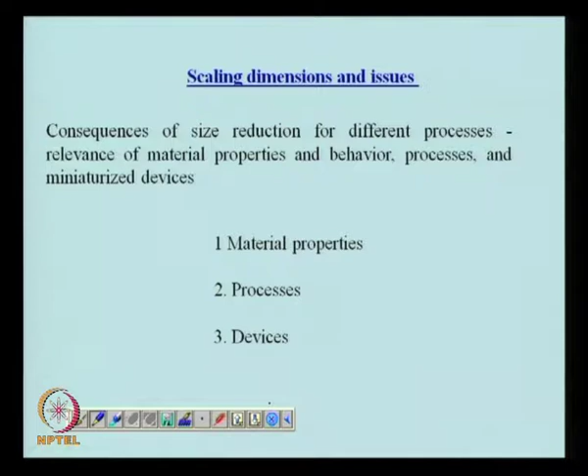For example, one of the interesting ways by which a process can behave differently is that the material properties of the liquid, of the fluid present in the system, may behave differently when the sizes are reduced to a certain level.

So, in today's class, we will see principally how the reduction in dimension of a system can result in substantial changes in the material property, changes such that many of the equations which were applicable for bulk flow will no longer be applicable for such systems. We would also see that measurement of any property may show statistical fluctuations which cannot be ignored.

So, depending on where you measure a specific property, let us say the density, the concentration of a fluid, you may get different results. You would also see that all the gases present can be divided into two categories, what is known as the dilute gas and the dense gas.

The equations of motion, for example Navier-Stokes equation, may not be applicable in some such systems where the sizes are very small, or where the pressure is relatively low and so on. So, there is definitely a need to demarcate the region where these equations, the continuum concept, is applicable, and a region where these assumptions, this continuum assumption, will start to show significant deviations.

So, what should we do? There are different ways to treat systems which are in different zones of continuum. In some cases the continuum theory is completely valid, in some it is partially valid, and in another it may not be valid at all.

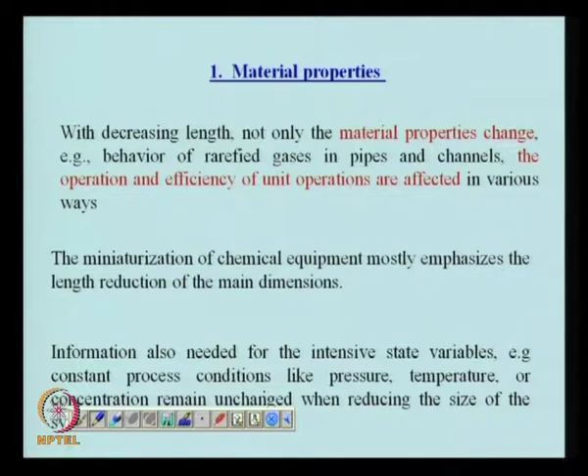So, in free molecular motion, the molecules do not come in contact, they do not collide, and they do not essentially see the presence of another molecule in there. So, it can traverse the entire dimension of the small device without encountering another molecule in its path. This is going to be characterized by a large value of the Knudsen number.

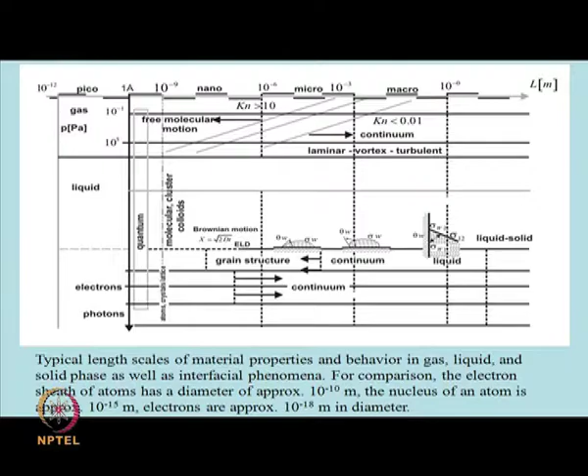Now, what is the continuum hypothesis? If we start reducing the volume of any system, at some point it starts to influence the properties of the fluid, and the measurement of process parameters like density, velocity, or temperature will be affected by the reduction in size of the system.

Physical quantities and fluid properties are usually treated as being uniform over a control volume, so no matter what the control volume size, we assume the physical properties do not change. But if we think of a very large control volume, then you can have spatial or temporal variation of properties.

At one end of the spectrum, the physical or thermophysical conditions, for example pressure, could be widely different from one location to another, and the best example is the atmosphere. It's such a large system that you can have variation in pressure depending on where you are. Inside this room the pressure is uniform everywhere, but if you go 10 kilometers away, the pressure may vary. So for very large systems too, you may see a change in the properties of the system.

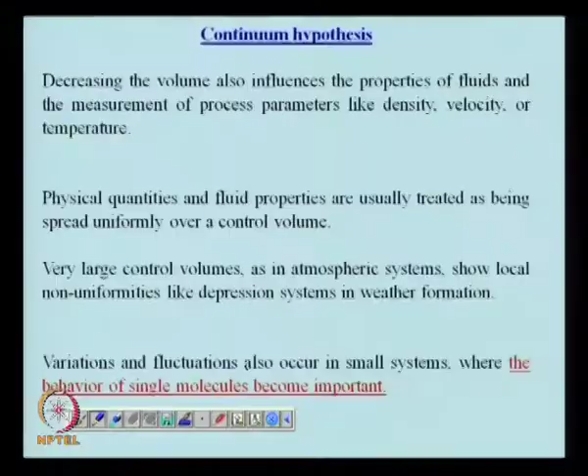So if your measurement volume is 1 micron by 1 micron by 1 micron cube, and your pressure is really low, the number of molecules can vary significantly inside that cube. So you may have a fluctuation due to the absence or presence of molecules in such a control volume.

This effect of the size of the sensitive volume on the density is usually measured by an instrument. So depending on the amount of volume necessary to measure a property by the instrument, its reading may vary when you reduce the size of the system.

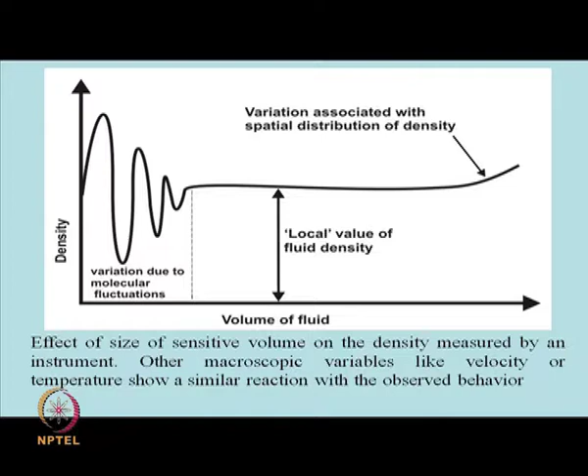And we would see how this is going to affect the continuum hypothesis. So, when we start reducing the volume, the molecular fluctuations would start to disturb the smooth measurement. So, you are not going to get one value of pressure, but you would rather get a fluctuating pressure that can vary widely from one instant to another.

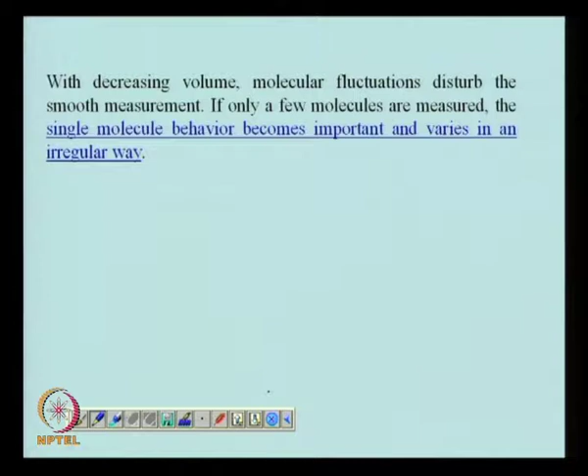So, when you reduce the system to such an extent that you are measuring only a few molecules at a time, then the single molecule behavior will become extremely important and will vary in an irregular way, and we would like to see how we can express such variations using non-conventional approaches other than the continuum assumption.

So, the definition of a continuum is that a fluid can be regarded as a continuum where the fluid properties you measure will be constant for sensitive volumes, that is the volume necessary to measure that property with the instrument you are using. And the volume used to measure the property is small on a macroscopic scale, but large on a microscopic scale. So, I would give you an example of what we mean by macroscopically small but microscopically large.

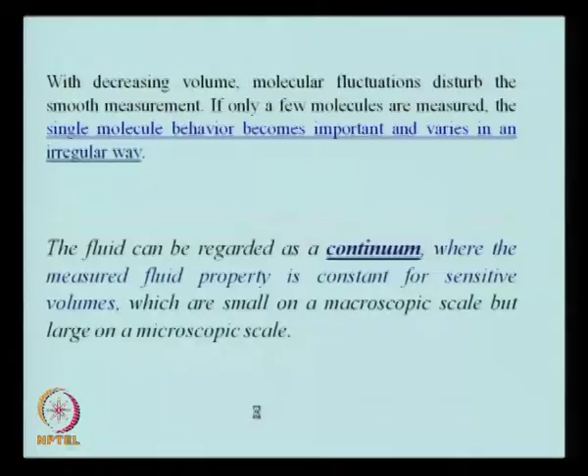Let us say we take air and try to see the number of molecules present in air at normal conditions. Think about a 10 micron cube, instead of the 1 micron cube example I gave you. It is a cube formed of 10 micron by 10 micron by 10 micron. If you calculate the number of air molecules present in such a cube at normal pressure and temperature, you would see they are of the order of 10 to the power 10. So, it is a huge number of molecules.

So, the effect of molecular fluctuations on any measured property will not be felt if your measurement volume is 10 micron by 10 micron by 10 micron. So, for all practical purposes, these statistical fluctuations are going to be insignificant in such a system at normal pressure and normal temperature. But what happens if we reduce that pressure or the temperature?

That is something, or if we reduce from the micron level to the nanometer level. So, would it still represent a situation in which the properties are going to be independent? Are the sensitive volumes still going to be so large that the number of molecules present in it are going to be very, very large, of the order of 10 to the power 8 and so on?

So here you see the sensitive volume of a 10 micron cube is very small when we think about the macroscopic scale, but it is still very large when we think about the microscopic scale, because the number of molecules present in such a system is so large.

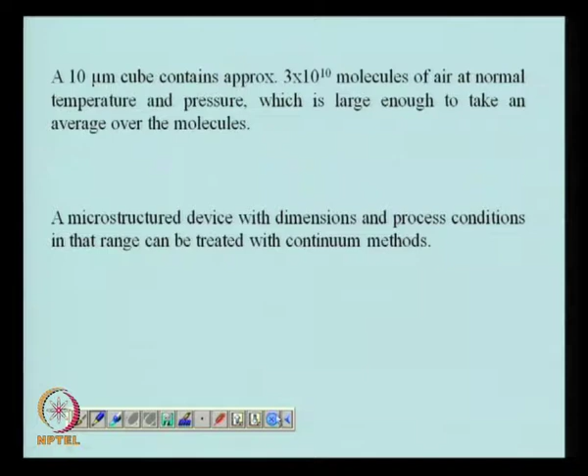So, if you think of a microstructured device whose dimensions and process conditions are of the order of 10 micron, 1 atmosphere, and let us say 25 degree centigrade, then in that range the fluid present in that microscopic device would obey the continuum assumption. All the methods and models available for continuum situations would be valid in such systems.

But we are more interested in the limits of the continuum hypothesis, where they are going to be reached, where the continuum assumption will not hold good, and a description of the gases which are also termed as rarefied gases beyond the continuum hypothesis. So, you would like to see where to draw the line, how to present a quantitative way to decide whether you have reached one limit or the other of continuum.

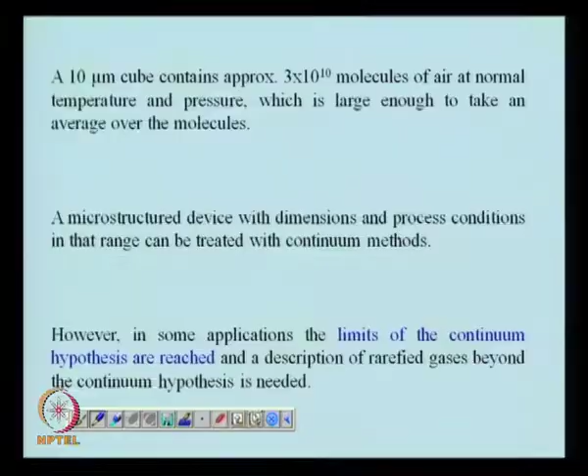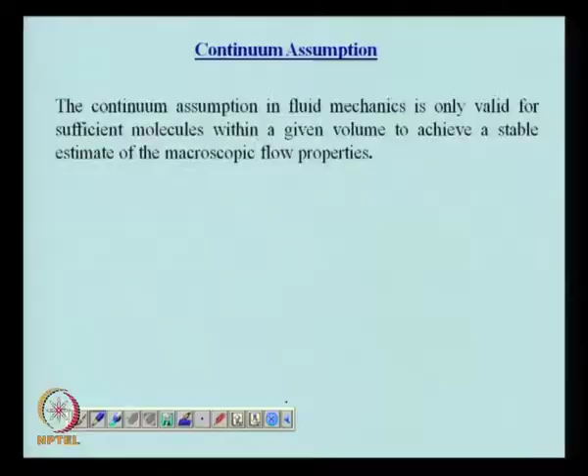So, the continuum assumption in fluid mechanics is only valid when you have a sufficient number of molecules present in a given volume, so that you achieve a stable estimate, stable meaning there are no fluctuations in the macroscopic flow properties. So, the pressure, temperature, etc., will remain constant throughout your measurement.

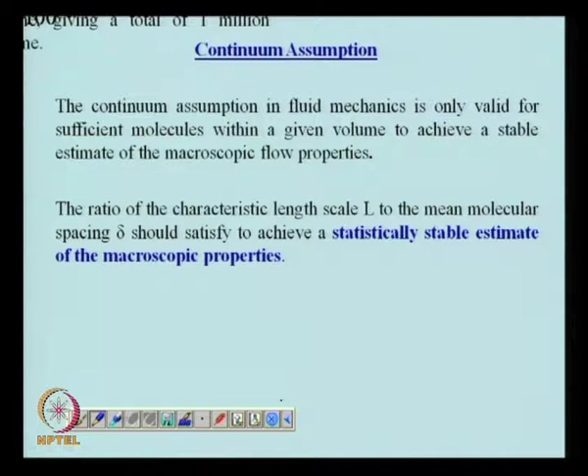So, this length scale that we need, the ratio of the characteristic length scale to the mean molecular spacing should be large, so as to obtain a statistically stable estimate of macroscopic properties. So, the mean molecular spacing should be quite small compared to the length scale, and it has been found that when L by delta, where L is the characteristic length of the device and delta is the molecular spacing, is greater than a certain number, then we can assume that we do not have any statistical fluctuations present in the system.

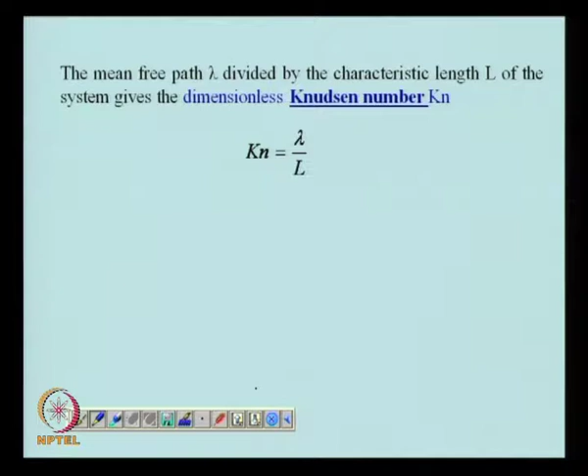Another way to say when I am going to reach the limit of continuum is to define a number called the Knudsen number, which is defined as the mean free path of the gas molecules divided by the characteristic length of the system. We get a dimensionless number known as the Knudsen number, and depending on its values, one can decide where we are in terms of rarefaction effects on the flow regimes of a gas. For different values of Knudsen number, we can classify flow regimes to say that this obeys continuum and this does not.

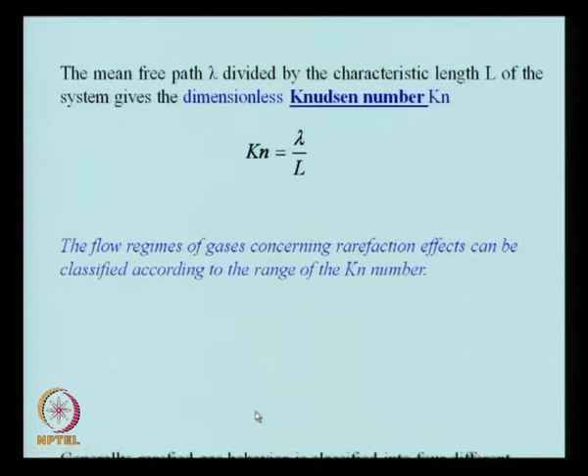So here you would see that for small values of Knudsen number, we can assume it is a continuum flow regime. That means the properties are going to be more or less constant, and you are going to have no slip conditions, validity of no slip conditions, and so on.

Between a Knudsen number of 0.01 and 0.1, we have the slip flow regime. We will discuss all these in more detail. Then when the Knudsen number is of the order of 1, you get a transition regime which lies between slip flow and free molecular regime, which is classified for a Knudsen number greater than 10. So, in between free molecular regime and slip flow regime, we have the transition regime.

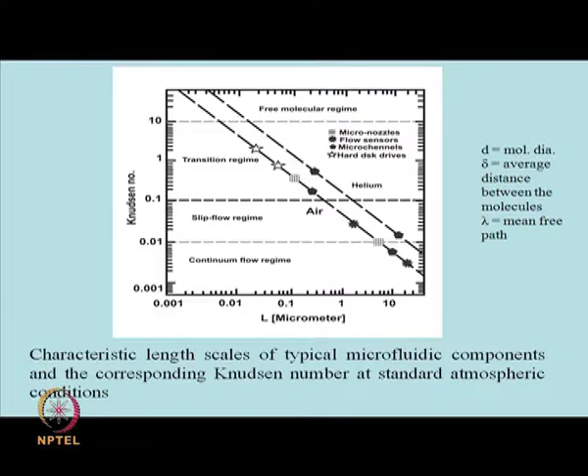So we will first start with situations in which Knudsen number is less than 1 into 10 to the power minus 2. This refers to complete validity of the continuum model. The continuum model says that when you measure a property, that property will not vary based on molecular fluctuations. You can use many equations valid for macroscopic systems, such as the Navier-Stokes equation, to describe the flow inside such a system, and you are also going to have no slip boundary condition at the solid fluid interface.

And if you think of the energy equation, you can assume without any error that the temperature on the solid side of the interface is equal to the temperature on the fluid side of the interface. In other words, the temperature is a continuous function even at the interface, without a jump of temperature or pressure at the solid fluid interface. So any system in which the Knudsen number is less than 10 to the power minus 2 can safely be assumed to follow continuum models, with all equations and boundary conditions normally taken to be valid for macroscopic systems.

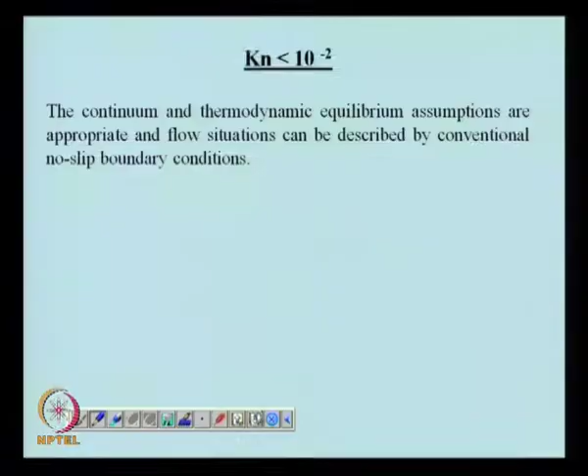Next, we come to the point where Knudsen number is between 10 to the power minus 2 and 10 to the power minus 1. Here, some models and equations, for example the Navier-Stokes equation, will still remain valid. Even though it cannot truly be said that it follows the continuum model completely, certain alterations or approximations need to be introduced into the Navier-Stokes equation to be used in the slip flow regime. As the name suggests, you have to assume that there is a slip between the gas molecules and the solid at the interface.

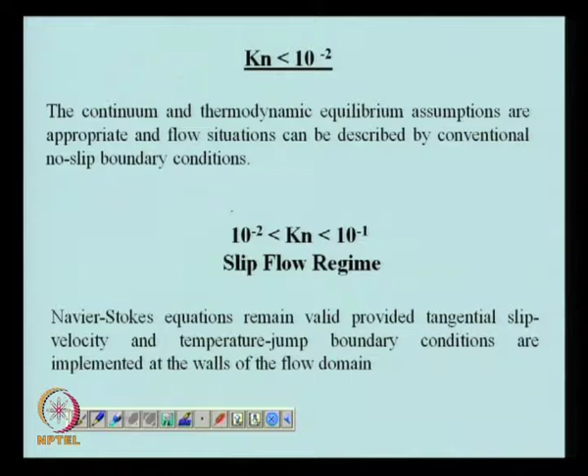As long as a slip flow is assumed, a temperature jump is assumed at the fluid-solid interface, and the Navier-Stokes equation can be used without any problem. This is a very common situation in microfluidic devices, the slip flow regime, and it becomes important when the Knudsen number is between 10 to the power minus 2 and 10 to the power minus 1.

Then comes the third flow regime, known as the transition flow regime. In this situation, the continuum and thermodynamic equilibrium assumptions of the Navier-Stokes equation start to break down, and you need alternative analysis methods, such as molecular dynamic simulation or Monte Carlo simulation.

You will not be able to use continuum models such as the Navier-Stokes equation, even with the introduction of slip flow, because the continuum limit is exceeded and there is a breakdown of thermodynamic equilibrium at the interfaces, but it still cannot be called free molecular flow. So this is transition flow, and it is also quite common in microsystems.

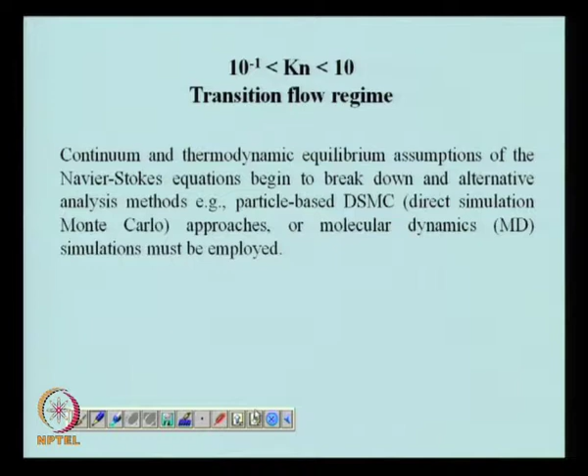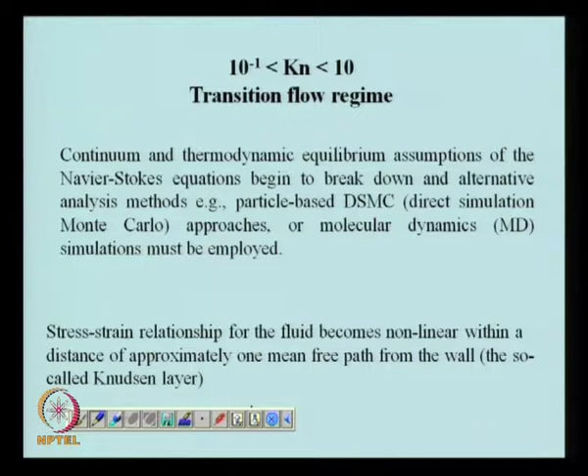Another interesting phenomenon in such systems is that the stress-strain relationship behaves in a nonlinear fashion within a distance of about one mean free path from the wall. This is called the Knudsen layer. If you cross the Knudsen layer, the stress-strain relationship will no longer remain linear. This is an additional complication one has to account for when modeling flow in the transition regime.

Finally, for large values of Knudsen number, we come to a situation known as free molecular flow, where the mean free path of the molecules is far greater than the characteristic length scale. Your characteristic length may be 0.1 micron, but your mean free path, because of the pressure and temperature conditions of the gas in such a micro device, could be 10 microns. So you have a large difference between the size of the system and the mean molecular free path.

The mean free path will be much more than the size of the system. Therefore, a molecule which gets reflected from the device surface will reach the other end of the device before it comes in contact with another molecule. That is why it is called the free molecular flow of gases in such a system.

As you can clearly see, the continuum approximation has no meaning in situations like this, because you just have a few molecules in a device, and relative to the size of the molecule, the device is very, very large, and relative to the separation between the molecules, the device length is very small, so that you do not have many collisions of the molecules in between.

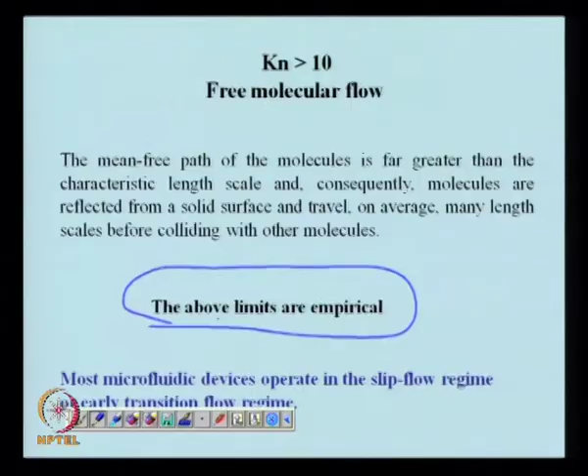Fortunately, most microfluidic devices operate either in the slip flow regime or in the early transition flow regimes. So many continuum models will be applicable if we add the slip flow condition at the solid-gas interface. The equations remain the same, but the boundary conditions need to be modified to analyze such situations.

Now, the question may arise: what is the length scale? Is it the smallest length of a device that is going to be termed the characteristic length, or is it something else? In order to circumvent the problems associated with defining the characteristic length, this definition is sometimes used: the property divided by the gradient of the property, which has dimensions of length, is sometimes called the characteristic length.

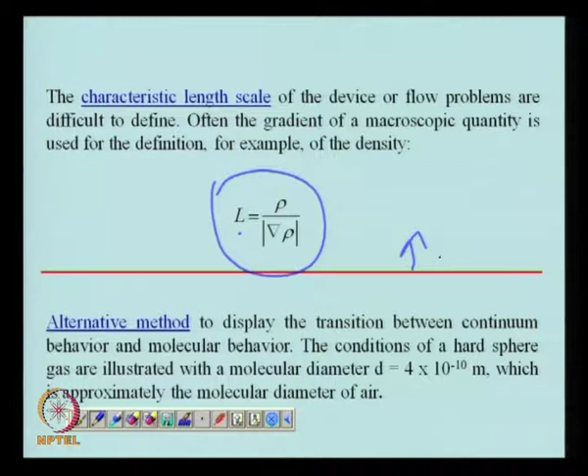So there is an alternative method. Up to this point, we had classification of systems based on Knudsen number alone, but there is an alternative method which displays the transition between continuum and molecular behavior in a more detailed and fundamental way, where we know precisely which assumptions of the continuum model are going to be violated and what can be done to address those violations. It is a more in-depth study of the variation of the transition from one regime to another, which I am going to present next.

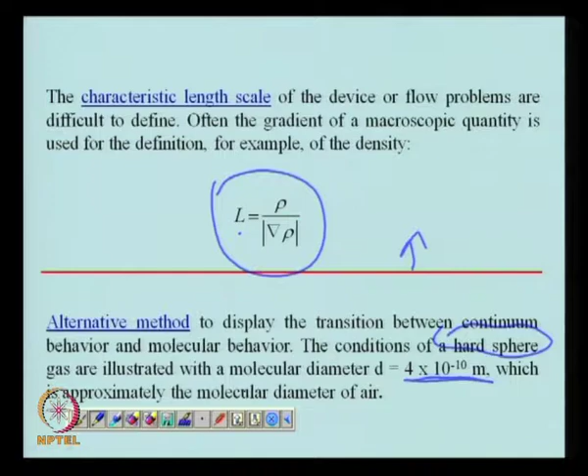For this, I take an example where we assume a hard sphere gas with a molecular diameter of 4 into 10 to the power minus 10 meter, which is approximately the molecular diameter of air. With that we would plot this, and this plot gives us more insight into the process.

On the left y axis we have the characteristic length L, defined either as the smallest system dimension or as the property divided by the gradient of the property, as I said before. On the top x axis is the intermolecular spacing normalized by the molecular diameter, where delta is the average distance between molecules and d is the molecular diameter. On the right y axis we have the length ratio L, the system dimension, again normalized by the molecular diameter. So these two axes are related, one is just length and the other is normalized length.

The bottom x axis shows the variation of a physical property or physical situation, such as pressure or density, normalized by density at some standard condition P0. Here you see that the flow regime, the nature and condition of the system, differs based on where you are located.

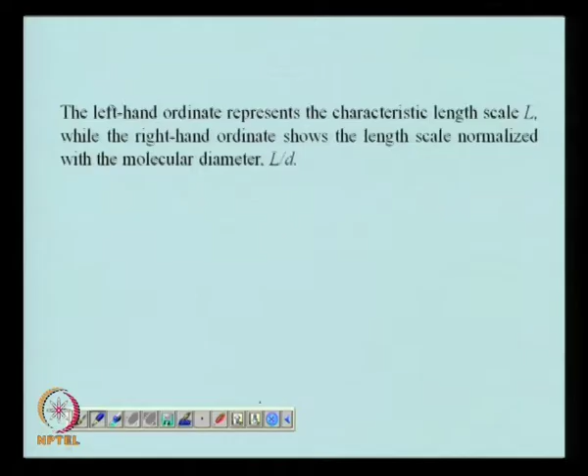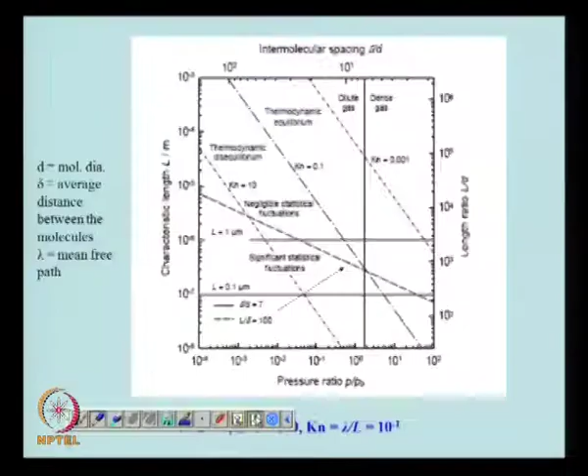Now, we see that the zone of applicability of the Navier-Stokes equation is given by delta by d equals 7. L by delta has to be in the upper half of that line corresponding to L by delta, and Knudsen number should be equal to 10 to the power minus 1 or smaller.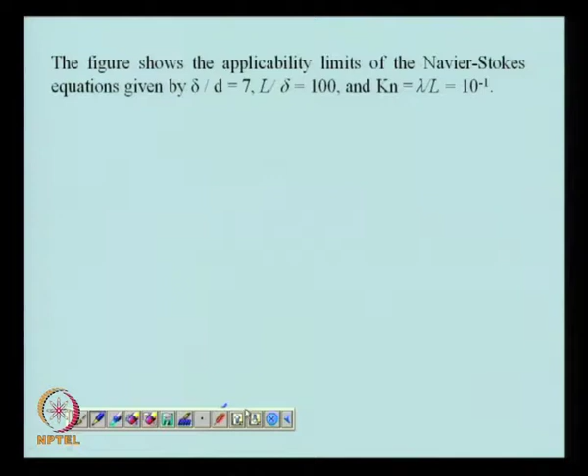And if you think of air, you would see that it has a number density at 1 atmosphere pressure of 2.6 into 10 to the power 25 per meter cube, and a delta by sigma which is about 8.5. So with these values, one can say that air is a dilute gas, but it is close to the upper limit of the dilute gas assumption.

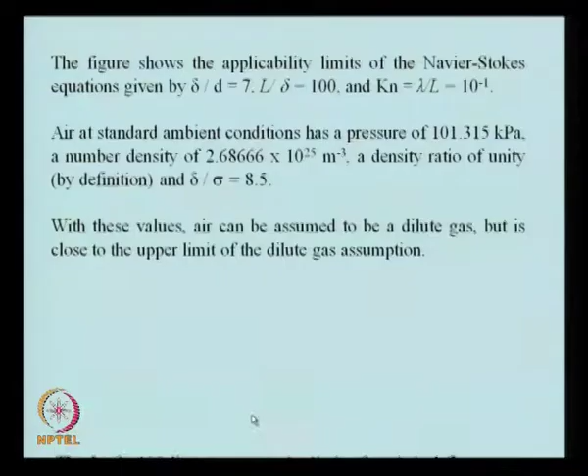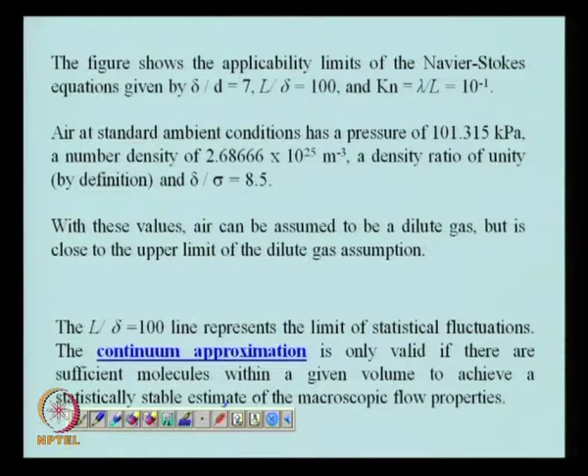And this L by delta equals 100 line represents the limit of statistical fluctuations. You have to have a sufficient number of molecules within a given volume to achieve a statistically stable estimate of the macroscopic flow properties. So, in order for the continuum approximation to be valid, your system or conditions should be such that your L by delta is above that 100 mark line.

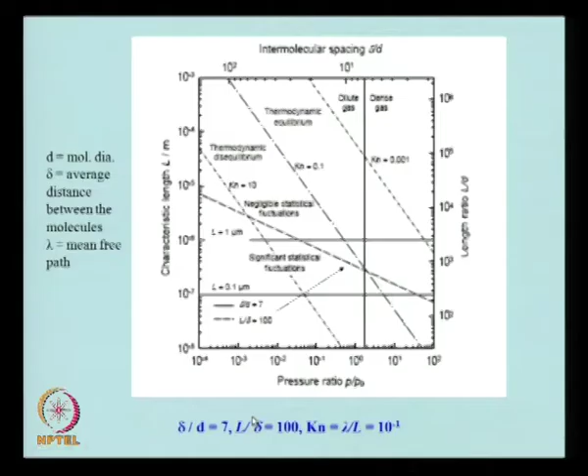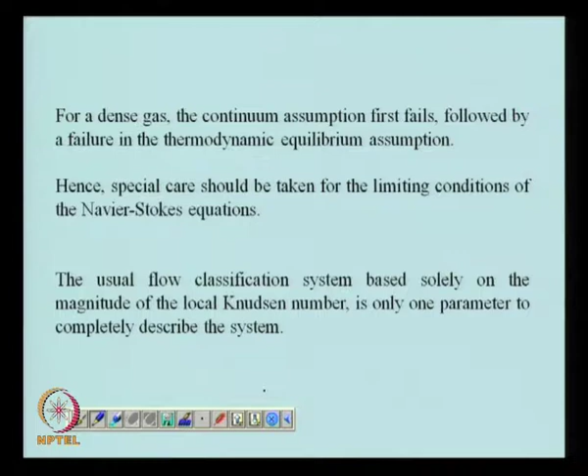So, one should take special care for the limiting conditions, to use the limiting conditions of the Navier-Stokes equation. And as you can see, the magnitude of the Knudsen number is just one parameter, one of the many parameters, one of the 4 or 5 parameters which I have mentioned that describe the nature of the system.

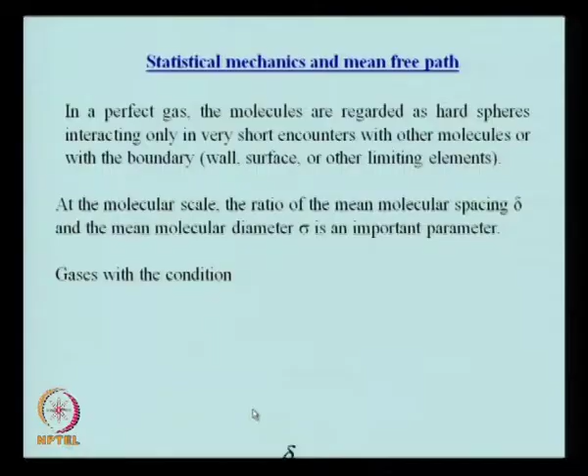Now, we come to our next part, which is statistical mechanics and mean free path. Usually gases with the condition delta by sigma greater than 7, where delta is the mean molecular spacing and sigma is the mean molecular diameter, this is going to be an important number, delta by sigma. Gases with the condition delta by sigma greater than 7 are treated as dilute gases, and if the condition is not satisfied, then the gas is called a dense gas.

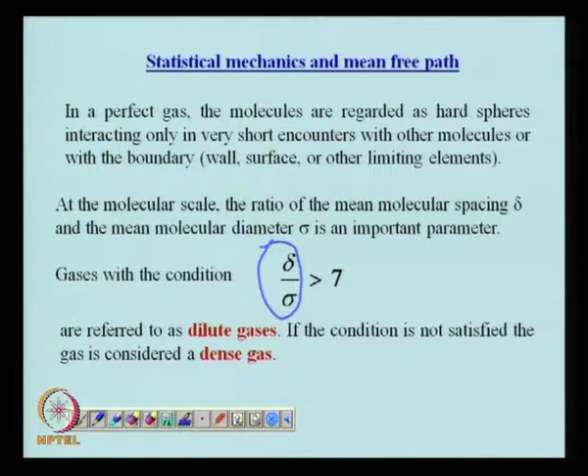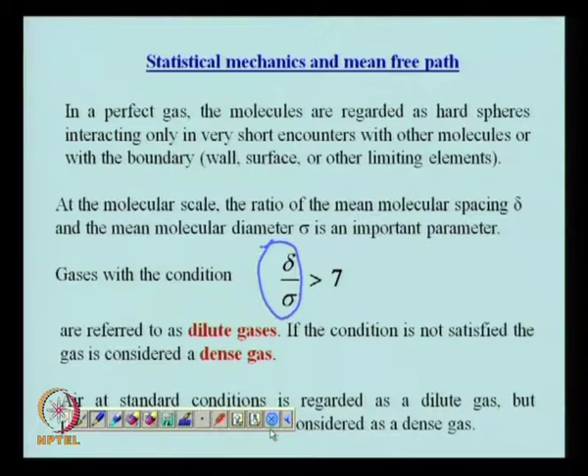So, air at standard conditions it's regarded as a dilute gas, it can be shown to be a dilute gas, but at higher pressure it is going to behave as a dense gas. Now, it is assumed that the probability of the molecule moving in a certain direction is equal in all space coordinates.

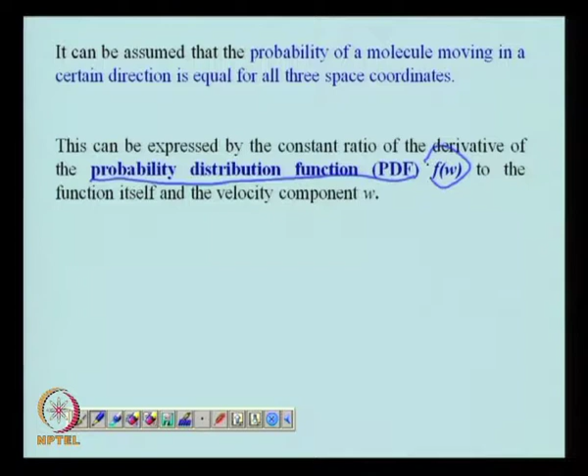This can only be true if this important parameter, the probability distribution function or PDF, denoted by FW, has its derivative with respect to the function itself and the velocity component expressed in a certain form. In other words, the ratio of the derivative of the probability distribution function to the function itself, and the velocity—if this ratio can be a constant, which for convenience we express as minus 2 gamma.

If this condition is specified, then the probability of a molecule moving in a certain direction is equal in all three space coordinates. So for this assumption to be valid, the derivative of the probability distribution function with respect to the function itself and the velocity component in any direction would have to be a constant, and on integration one can obtain this relation between the probability distribution function and the velocity in that component, where c is the constant of integration.

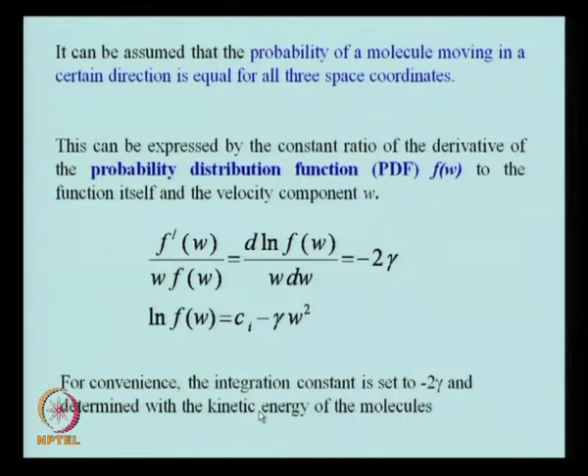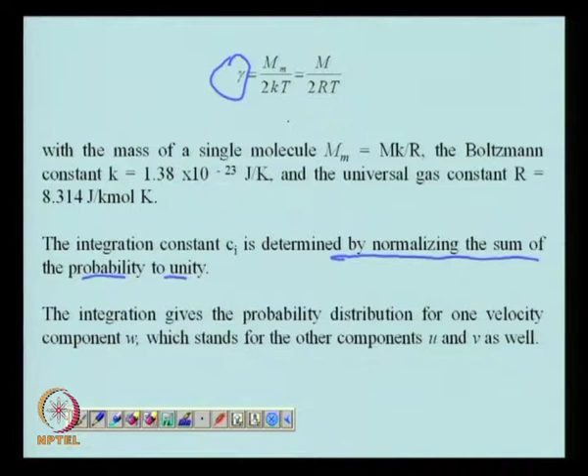This integration constant can be evaluated by normalizing the sum of the probability to unity, and therefore you can obtain gamma from the kinetic theory—this is the relation for gamma, and the integration constant can be obtained. So this integration gives the probability distribution of one velocity component, which is W.

The other components in other directions, u and v, can be calculated in a similar fashion—this is the probability distribution of the velocity in one specific direction, W. As you can see, it depends on the mass, but more importantly it depends on the temperature and so on. This distribution of velocity is known as the Maxwell velocity distribution of a perfect gas.

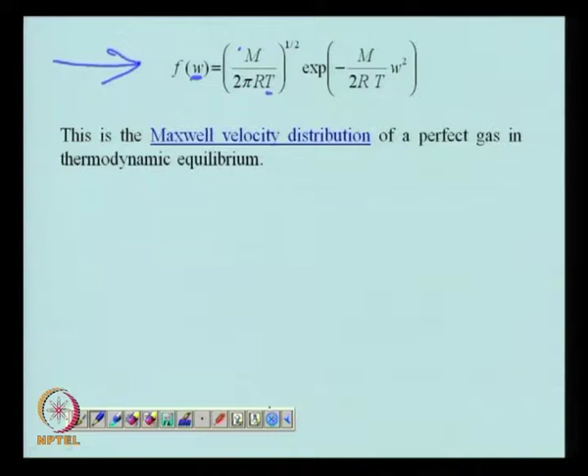Which is in thermodynamic equilibrium. Now, if you integrate this probability distribution function in all 3 space coordinates, it gives the probability of the absolute velocity. So this is the probability of the velocity in one component, whereas c is the absolute velocity, or the probability of the absolute velocity, which is independent of direction. This expression is the probability of the absolute velocity of a perfect gas in thermodynamic equilibrium.

This is extremely useful in some calculations, especially when used in conditions where the continuum approximation may not be valid.

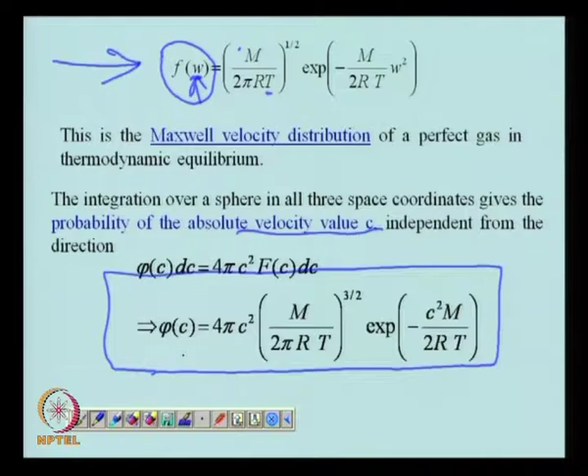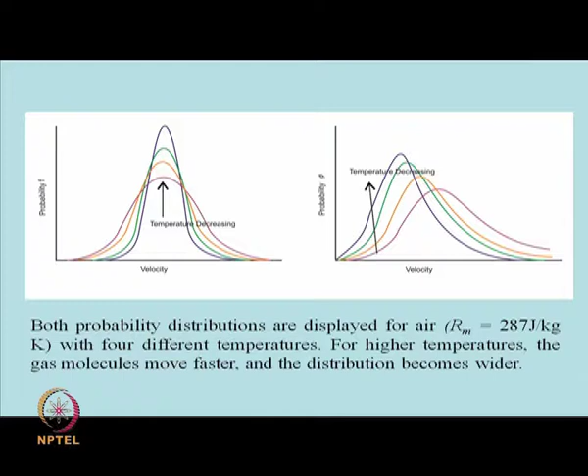There are 2 or 3 different definitions of velocity which one has to know, for the case of air or any gas. The most probable velocity is denoted as Cm, which can be expressed as the square root of 2RT over m, where R is the gas constant, T is the absolute temperature, and m is the mass of the gas.

So this is the most probable velocity of a molecule. The most probable velocity of a molecule can be obtained by differentiating the probability density distribution and finding where it has the maximum—wherever you have the maximum probability, the velocity obtained at that point is known as the most probable velocity of a molecule.

Now, if you look at the distribution of phi c, it is equal to 0 at c equal to 0 and at c equal to infinity. So somewhere in between there is a maximum, and the value of velocity at that maximum is denoted as the most probable velocity.

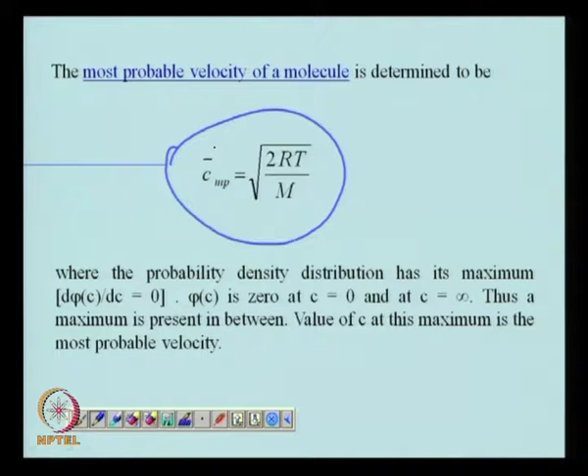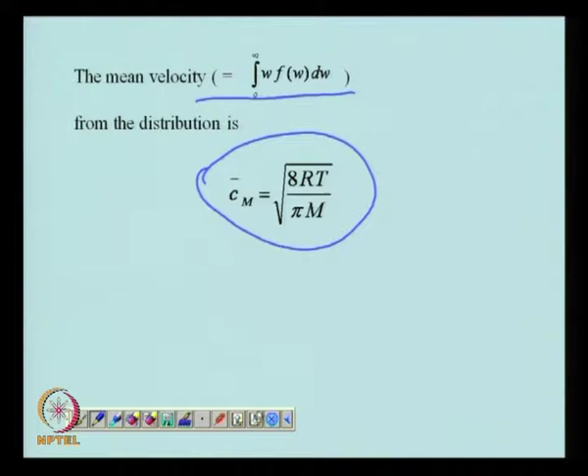You also have something called the mean velocity, which can be obtained as given in the formula, with this distribution—this is 8 over pi. When you compare this mean velocity with that predicted from the kinetic theory, it is essentially the same; the only difference is this is 3, whereas this is 8 over pi. That is the only difference between these two.

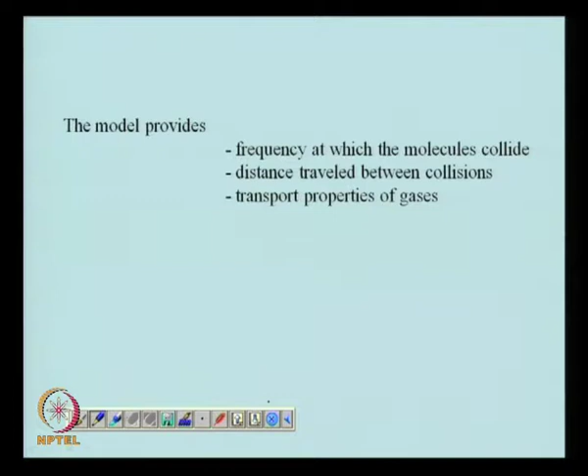So you can either express it in terms of probability distribution or in terms of kinetic energy only, and the mean velocity can be obtained as this. This model essentially provides us with the frequency at which molecules collide, the distance travelled between collisions, and the transport properties of gases.

This also tells us what the effect of temperature will be. As temperature increases, the velocities are going to increase, and we know from kinetic theory that increasing temperature energizes the molecules so they move faster with more kinetic energy, and the time of collision would also be less, since the value of W is going to be more. So the time difference between collisions between molecules is going to be small at higher temperatures, and so on. It is physically consistent with our understanding, and it gives us a compact expression to calculate the velocities of the molecules at a certain temperature and certain conditions.

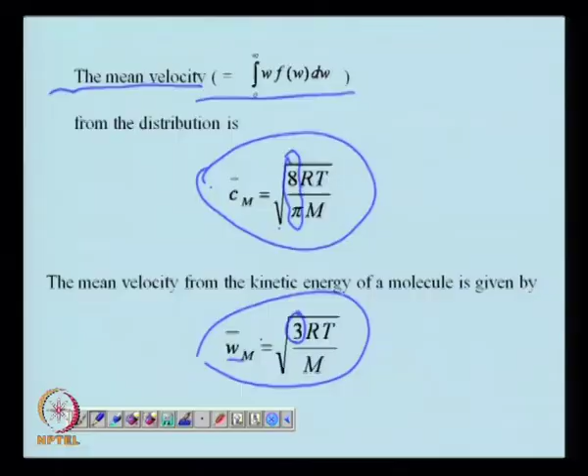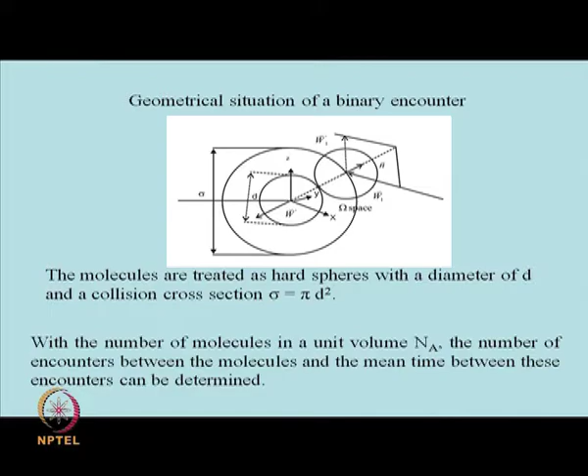Finally, there is one more model you are probably aware of: if we assume the molecules can be treated as hard spheres, and we look at the binary encounter of one molecule with another, specifying the number of molecules in a unit volume, we can calculate the number of encounters between molecules and the mean free path, and the mean time between these encounters. One can obtain the relation for the average length between two collisions using expressions for the mean free path. Here lambda is the average length between collisions, and it can also be expressed in this form. These are very useful relations telling us the interrelation between conditions in the gas, its size, and the concept of mean free path, which is extremely important in kinetic theory, especially when analyzing the free molecular flow regime.

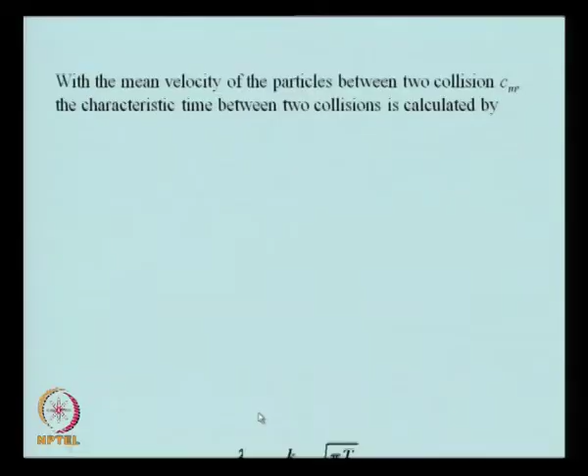Finally, when we know the mean free path of the particle and the mean velocity of the particles between two collisions, the characteristic time between two collisions can be evaluated, and as you can see, the collision time is proportional to the square root of temperature and inversely proportional to the pressure.

So, to summarize what we have covered in this class: it is extremely important to know exactly where our system is in terms of its adherence to continuum flow, continuum conditions. We know that when length dimensions are reduced, properties may fluctuate, and the thermodynamic equilibrium conditions imperative in the Navier-Stokes equation, one of the continuum models, are going to be violated.

So sometimes we try to decide the condition of a system based on one parameter only, which is the Knudsen number. But the value of Knudsen number, though indicative of the condition of the system, does not give the complete picture. Smaller values of Knudsen number tell us that the system is closer to continuum conditions, whereas Knudsen number greater than 10 tells us it is a free molecular flow situation.

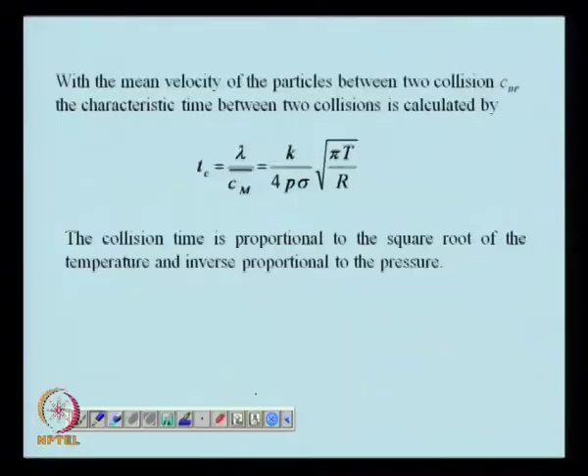But besides that, we also have to look at the value of L by delta. That is, if the value is less than 100, then we know that statistical fluctuations due to the presence of individual molecules will be significant. So when we think of the figure I showed you, it is marked by a specific region in which the molecule can be treated as obeying the continuum law. One has to see whether it is a dense gas or a dilute gas, and also look at the situations involved.

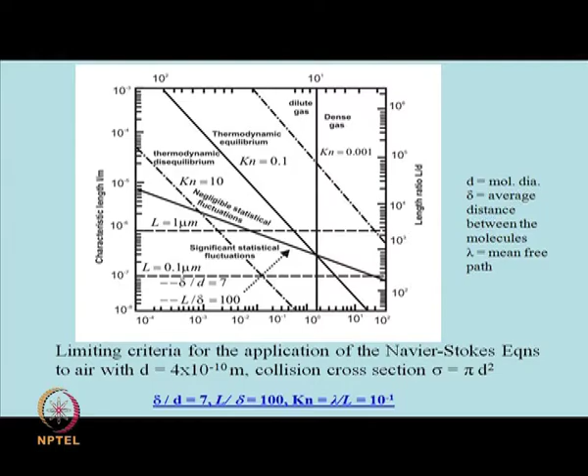Let me go back to that graph before I conclude today's lecture. One has to see where the conditions are located, and the region would be above this thermodynamic equilibrium line. So it should be this region, above this line. This is the region that roughly tells us whether or not the continuum flow model is going to be valid. There are different ways to treat systems: slip flow, the transition between slip flow and free molecular flow, and free molecular flow itself.

So, finally, looking at the statistical distribution of velocities in a system, we obtained expressions for the mean velocity, the collision time between two molecules, and we have seen how these vary as a function of temperature and other parameters of the system. This gives us a picture of the scaling dimensions where the effect on material properties is going to be significant, based on the size and the pressure-temperature conditions of the gases present. Thank you.